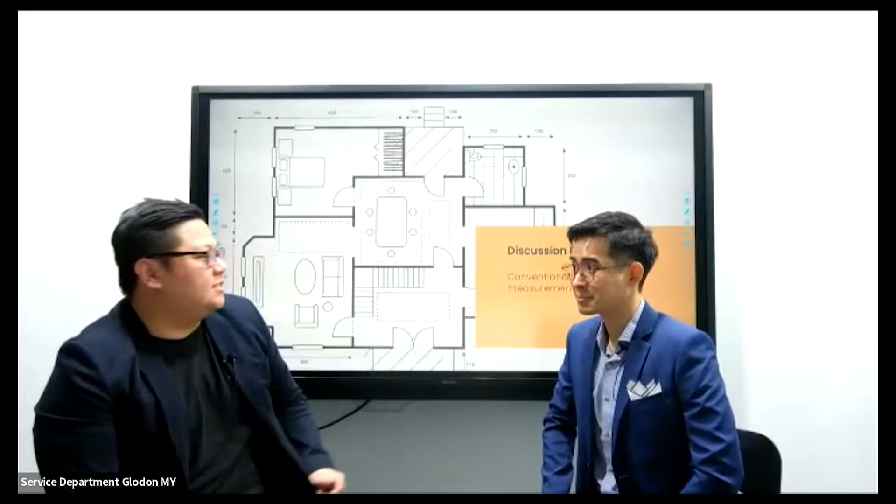If I were to compare conventional versus right now, I would say the first point would be time saving. Right now, with the software, we're able to see 3D. This is part of the advantage.

Compared with manual measurement, we already have a lot of drawings like the layout, section, elevation, details, maybe general notes - all this drawing. If you want to model a single piece of the thing, you have to have all this involved together. So sometimes in conventional method, which is manual taking off, you have to draw some sketches.

You get a very good imagination of those parts. I need to use my color pencil, color it and draw a sketch. Then you can have a clear picture, and then you can start to model the thing. Make sure you don't model it wrongly.

But compared to software, right now we can do 3D, which is a game changer since Glodon software came to Malaysia. You can model this thing fast in 3D form, and it's also easy to teach.

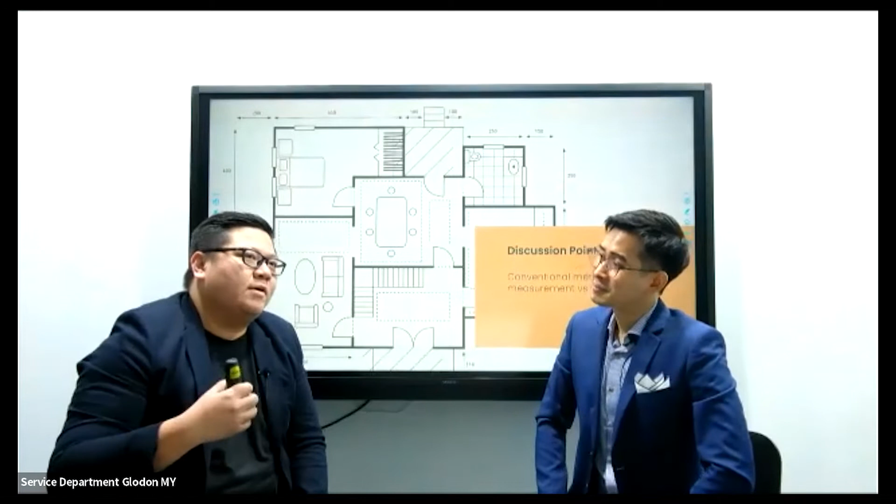Correct. So I think Chris is actually talking about when we want to do the modeling, you need to understand more on the drawing first. To understand more on the drawing, you need your color pencil, your highlighter, so everything prepared when you think better. Sometimes, when I was young, I didn't have much experience but was also very busy. I just had to stay at the drawing for quite some time, and magically it will appear in my head. So it's not quite an efficient method.

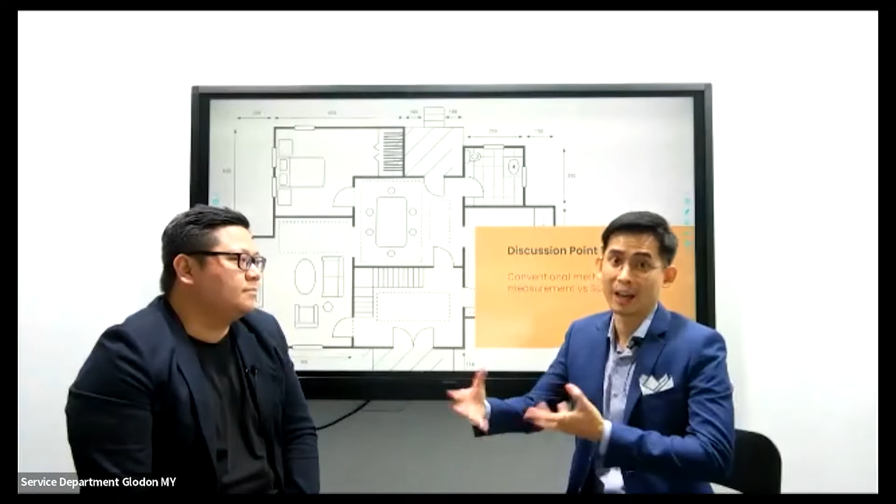Because right now we have a lot of options already, like the software. And Zoom is the best way that we can leverage on this 3D skill to save more time, so the company can do more job and then can go back early.

No way, OT. This is an interesting part for all of you. I don't know what the OT is. Okay, let's talk about the 3D.

So any other points we think? Maybe on the traceability or anything? Yes, exactly, another part is traceability. What I mean by traceability is you can imagine we have all these records in a spreadsheet, if I compare with manual measurement, manual takeoff, conventional method. So we have all this thing, then after we take off, we put it for quite some time. When your senior or your boss asks you, hey, how do you take off this part, show me this thing, show me this thing, it's very hard that everyone can have the same immediate recall on the thing. Because in QS we handle a lot of stuff, not only one - we have to handle tendering as well, other stuff on site, and also taking off other projects, not only this project. So it will make it very difficult to trace.

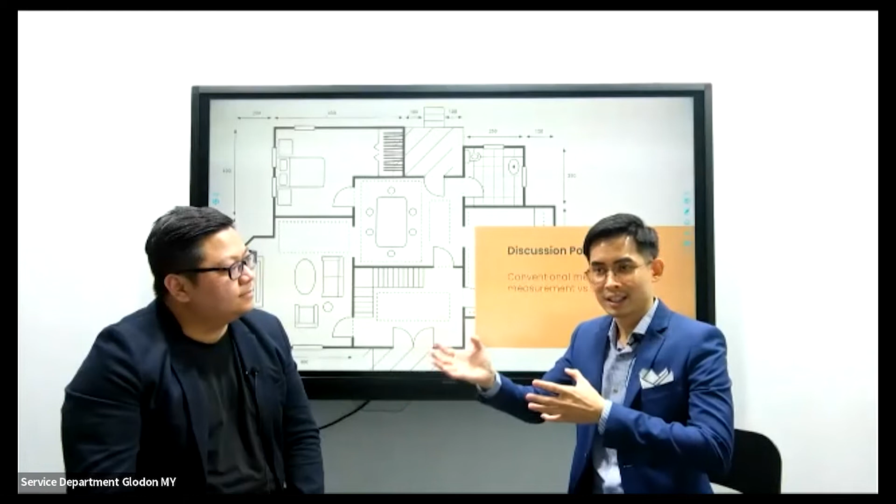However, using Glodon software, we got this function called reverse check model. If you've done it correctly, this whole model will tie into your drawing, and it becomes very easy to let you record - even because we can do 3D. And also by using these features, it's very easy that we can record back the time on how we do this part, because our brain also has 3D which makes it more memorable compared with the manual takeoff.

Yes, true. So let's say if I have a project today, the project duration for sure will be 3 to 4 years. So I think Chris brings a very good point, that with traceability, let's say I'm doing it manually in the dim sheets or Excel, I do not know what is the traceability of this distance, this dimension getting from each drawing.

Then we just come to another part, another best feature is reporting. This means that you need a lot of bookkeeping. For example, in conventional method, after you've done everything, you need to mark it on the drawings, you highlight it, and then you put on the takeoff, the sketches, and also all the Excel that you have done.

So we have to do safekeeping for quite some time. Usually after a period of time, let's say half a year, maybe 1 year, you need to take those things again and record it back. So it's also very impossible - we all know the construction industry, people come in and people go, quite often.

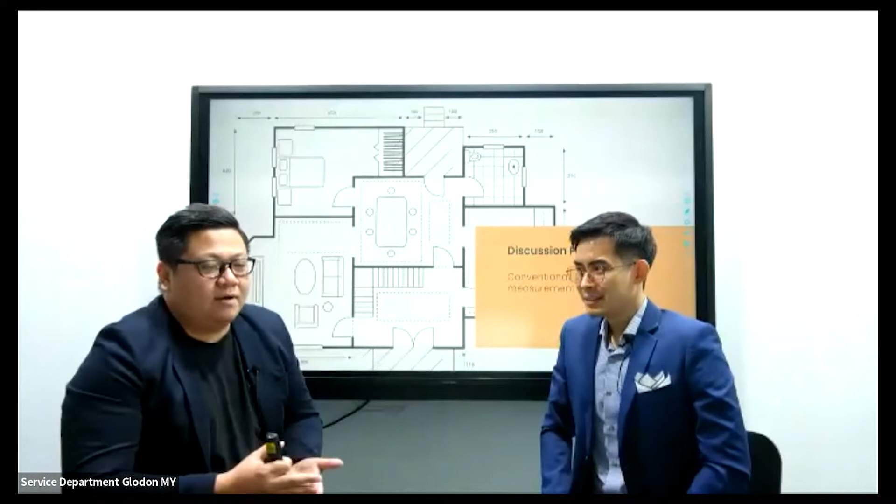So meanwhile, let's say you haven't finished the finalization of accounts, so you need to refer to the drawings. How are you going to refer to the drawings? Oh, I need to drive my way maybe 1 to 2 hours to the shop, to find the archive box, take it from the list, take out the drawings, and then bring it back to the office to recheck everything.

So from here, the productivity, as you said, will be reduced. So you're also wasting a lot of time doing the tracing. I believe our software is able to, as you mentioned, do the traceability in the reverse check model, and if you're using the 3D, you are able to measure confidently, knowing what you're actually measuring for.

Right, and lastly on reporting, we actually store every single report, and that's actually quite neat, quite nicely organized.

So Chris, can you share about before the pandemic and during the pandemic, how you see the situation? Yes, before, everything was like normal, using the same method, it's okay, it's struggling but it's also okay for a productive industry.

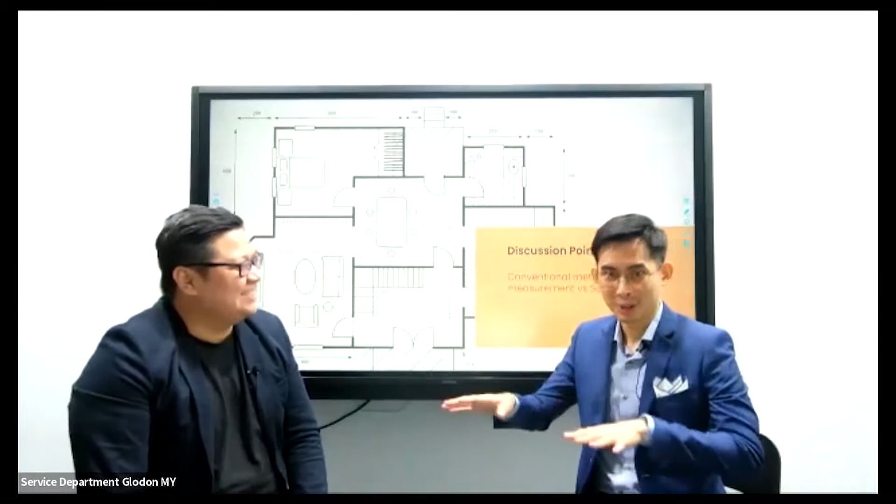Okay, we all know that during the COVID MCO time, we couldn't move. I needed to bring my desktop back home. Yes, so if you have a desktop, you'll have to bring your desktop, which is not a very easy thing, you know. You have to unplug all the company utilities and set it up in your house.

Yes, before that. But right now, even better, we have Zoom meetings. By using Zoom, I can just sit at home, at my own comfort, at my workstation, and present just like this, just like what you guys are doing, sitting on your own seat comfortably watching what we talk about. It's almost the same thing.

Yeah, also not only that, during the COVID time, working remotely actually helped because we leveraged a lot on software such as Zoom, cloud-based software, and one of them is the national Glodon software. So it helped reduce the risk of COVID transmission.

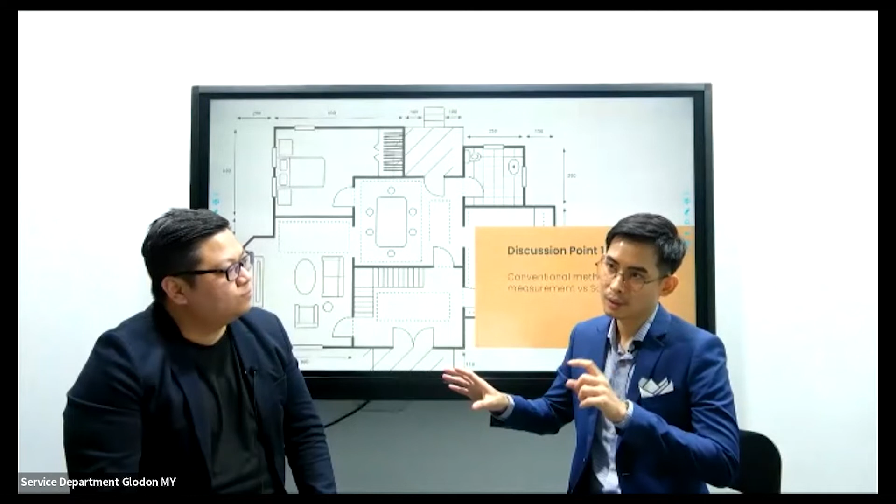It will eventually directly affect your company's operation cost. So is your operation cost fully utilized? And not just operation cost, the best part is I myself see my clients missing out on good opportunities because the operation cost was interrupted. They can't move at full speed, full operation. That's why they might miss some of the good opportunities when they come out.

Yes, this not only reduces your company's operation cost, but also affects your revenue indirectly. So leveraging technology, I think, is the only way, or also the most efficient way, that it can help during this period of time, and also in the next few years.

For me, I believe that we can prepare for the worst and expect for the best. And change out of necessity, I believe. So Chris is actually giving his talk, his own experience during the pandemic time, right?

I still remember during the pandemic time, I needed to carry all the hardware back home. Especially since I wasn't exposed to Glodon, I needed to carry my A0 drawing home. Anyone can imagine carrying an A0 drawing back home. If my house was a bungalow, there would be no problem, I'd have a lot of floor area. But I'm actually staying in a condominium, I don't have so much floor area, I don't have so many big tables.

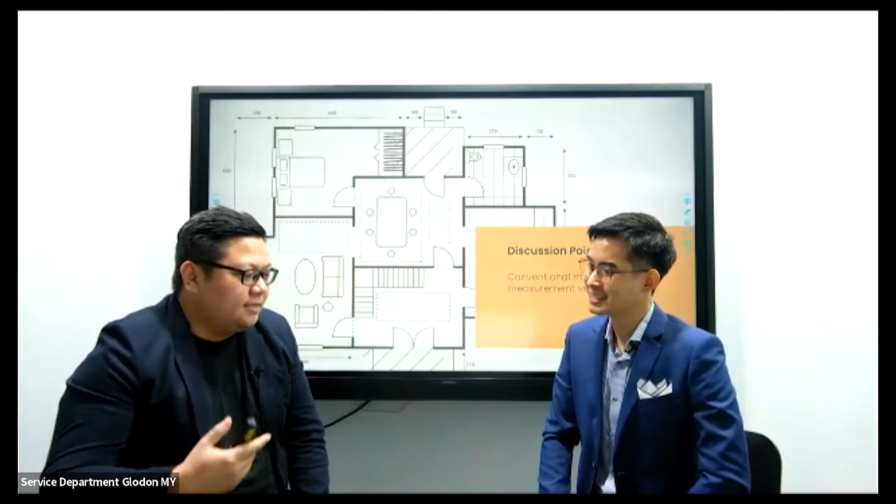Meanwhile, it actually brought a thinking for me personally, what are the other ways that can overcome this issue. Since my house is not big, I need to share, maybe with my dog, with my housemate. So it's kind of disturbing in our life. I think this is another way, another thinking about social life, on how we're going to do digitization, how it actually can help us.

Before we start this talk show, I just talked with Sam about working remotely. It's not about what we call emotion. I said, if you work remotely, then you have more time with your family, no? Actually, yes, more quality time with family. During the time I've not been working full time, not stationed in office, I stay at home, so I've been having more time with my family. I don't feel any different during COVID.

However, there are two stories I want to share, both from my clients, who told me personally. The first story is about a QS, around 30 plus, a friend of mine, and also a mother of one child. The child is quite 5, 6 years old, quite small.

She never talked about working remotely before. So when COVID hit, we had no choice but to work at home, during the MCO, the movement control, which other countries call lockdown. The government didn't allow us to go back to the office, so we had no choice but to work from home. She told me that unexpectedly, she didn't know she could work so flexibly and increase her productivity, with more time.

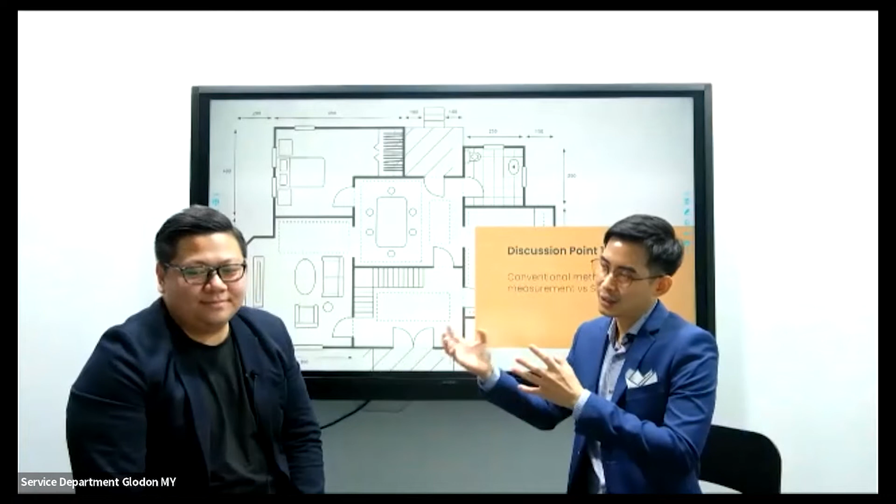Traveling, stuck in jam, and gossiping in the company, not actually working, everything links back to productivity. Yes, water cooler conversation, talking about all this nonsense. So by working at home, they converted this into quality time with family members, with her kids. She told me she wishes she could work remotely for as long as possible.

For me, when she told me this, I'm single. For me, kids are supposed to be put in daycare, I know parents will take care of it. So I don't actually know what she's talking about, but I can sense that it's quite authentic, quite real for her.

The second story is about the loss of great talent. This is a friend of mine, a very young QS, very talented, around 25, 26 years old. I think I met him last year. His job is a site QS, and he told me about this.

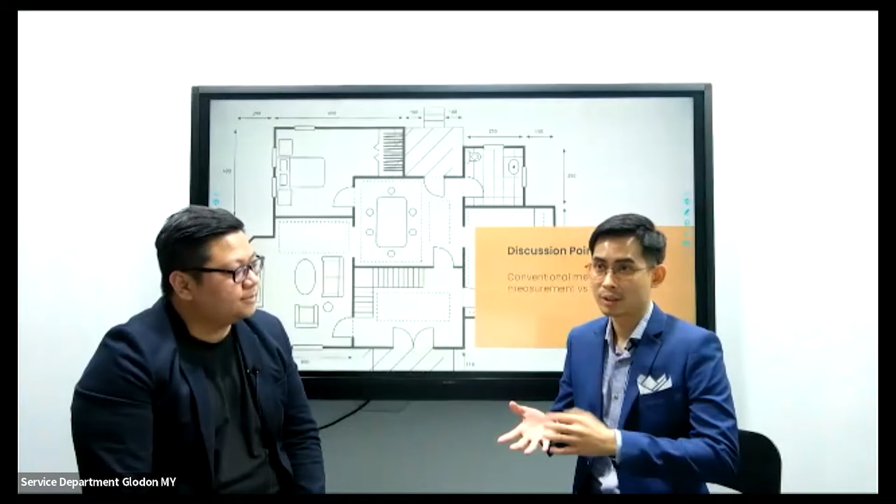Construction is already a dangerous job, we risk our life every day, because things fall down, you get injured, then you can't work anymore. Not only that, when COVID hit, he had no choice but to go to site, and had to have close contact with a lot more site personnel. So he got very fed up because of this.

Yeah, I understand, truly understand. That's why I can say it's a lost talent for the industry. So Chris, let's sum up this section on the conventional method versus the software method.

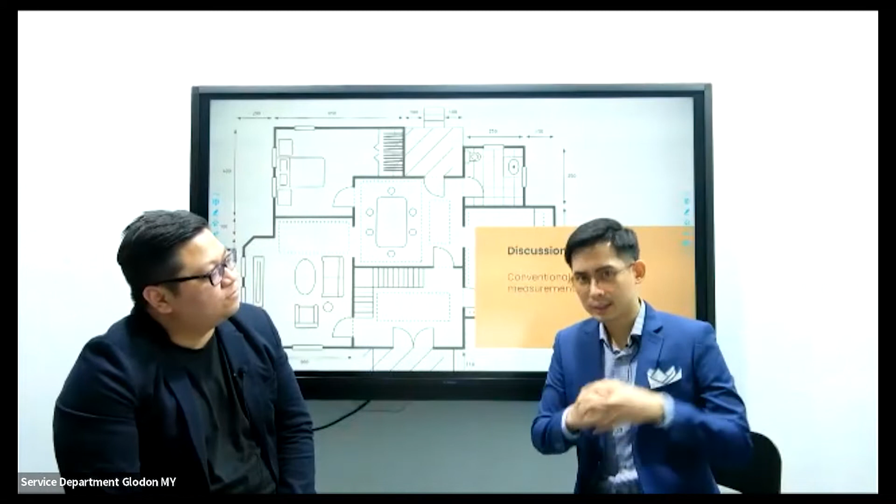It will be about productivity. I believe that in this situation, it's best that we leverage more on technology, rather than going back to what we had done before. I don't think those old methods really have the productivity or really work in this situation.

We should leverage more on the software. So when we talk about productivity, let's see Chris using our product, our Cubicost product, to model out some of our case studies, the successful case studies. It will be a sneak peek at our case study by Chris. So Chris, can you briefly introduce this project?

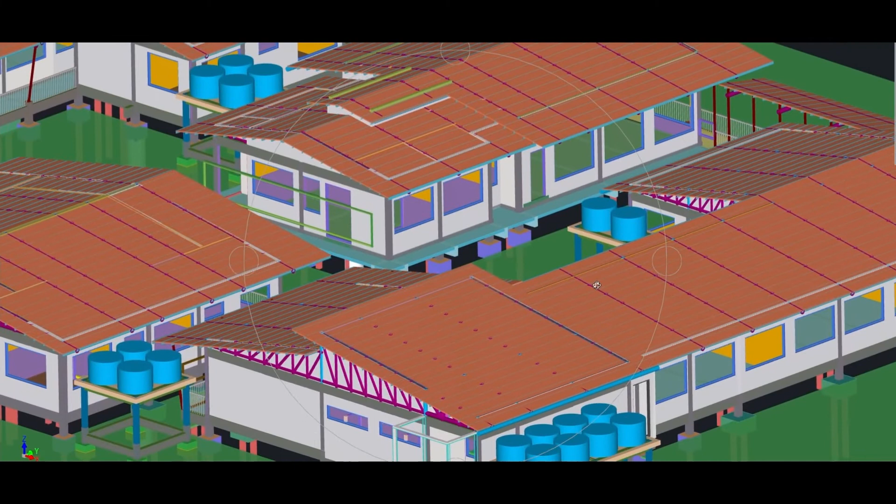You can see the water tank here, and I modeled most of the steel structure all together. When I take off the roof, you can see much more clearly how these structures are actually modeled inside the software.

So even the water tank, you fully utilize the function in TAS to model everything. Yes, not only the water tank, but the toilet holder and all these things use the custom quantity that we take off in that area.

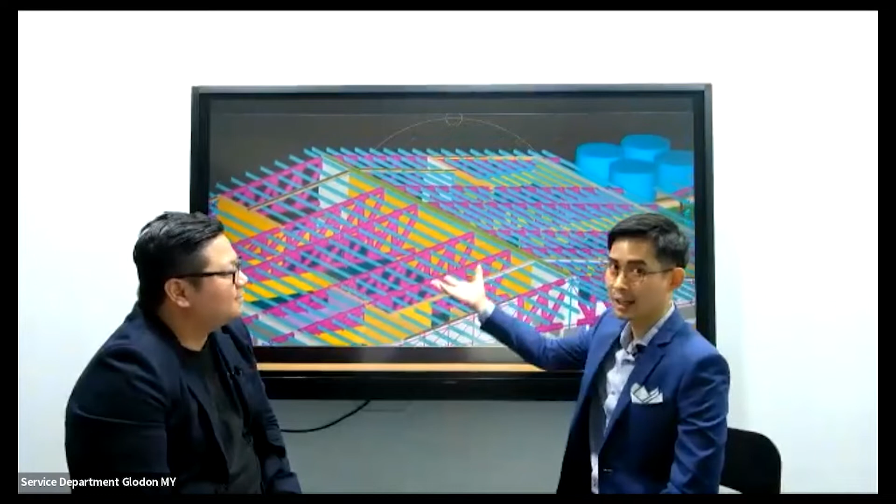So let's go back to what I said: one model, one TAS, one TRB, and one TBQ. These three store this whole data together, and it's able to be traced back very easily.

So this is very interesting. Even the details of all the main members, the components, or even the components for the bracings, everything is actually modeled out. Another project, this is the national school that I did quite some time ago, in 2017.

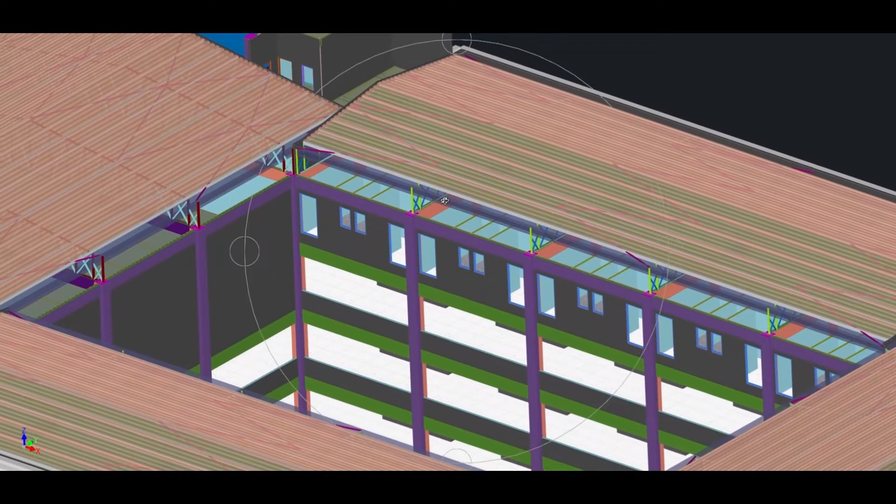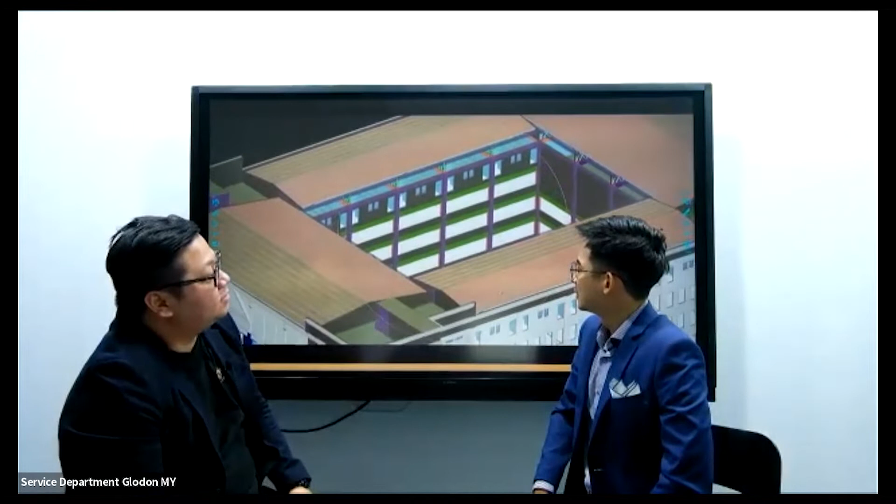They will use this steel structure for their structures, mostly at the roof, and roof and entrance. I think all these are the wind bracing, these bracings, the trusses. So what do you actually differentiate in terms of color?

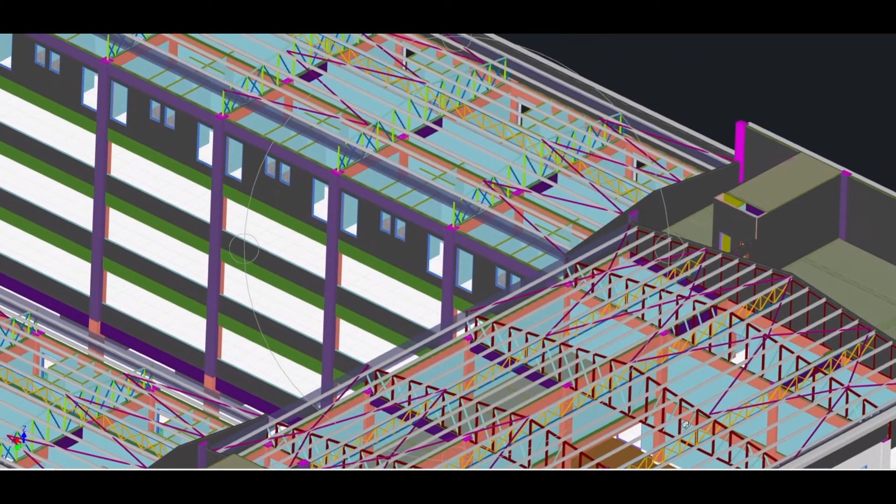Our color indicates the difference in steel I use. The gray color is the same type of steel, a C channel, so same kg. Why I need to separate by color is that when the client asks how many of this quantity this steel consists of, I can just straight away highlight it and show all the quantity and location.

For the specific area, you differentiate in terms of color by the component of the steel members. Exactly. So they can easily track the whole thing and visualize it before it's actually built. This is your ID, so all the bracing is here.

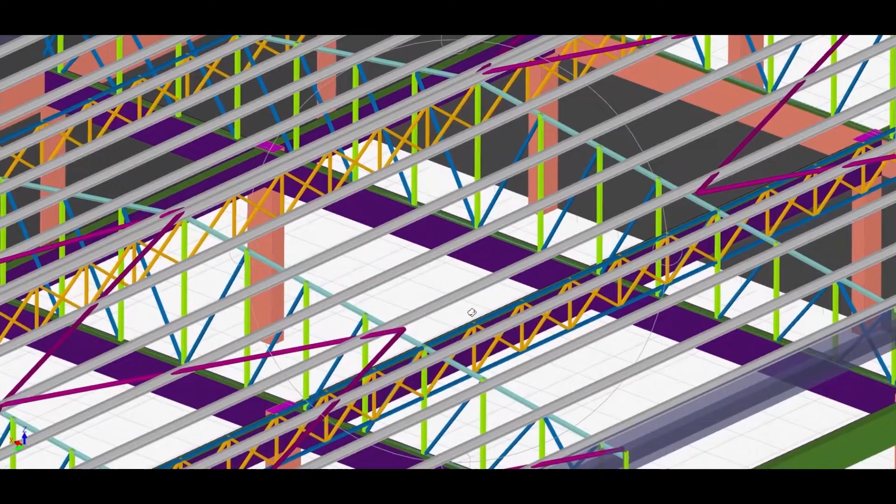So what you can see here is quite easy to understand, right? Yes, compared with manual measurement, where I give you a spreadsheet with tons of data, this one is the C channel, how many of them. So this is the first point, viewing in 3D. Back to my point, in 3D I think it's quite different if you can view my project.

So that's why you're the expert. Not expert, we just want to make the construction better, and also improve productivity. Plus point for your client as well.

If your client asks how these things look like, you can say my quantity is like this - even your building is not built yet, I can tell you where this quantity is located. So it's also a plus point when you talk to a client, and added value as a QS. Not only do we provide the quantity, not only do we provide the tender document and the estimation, we are building up our own value to let the client know we are better than a typical QS - we are a BIM QS, I can say.

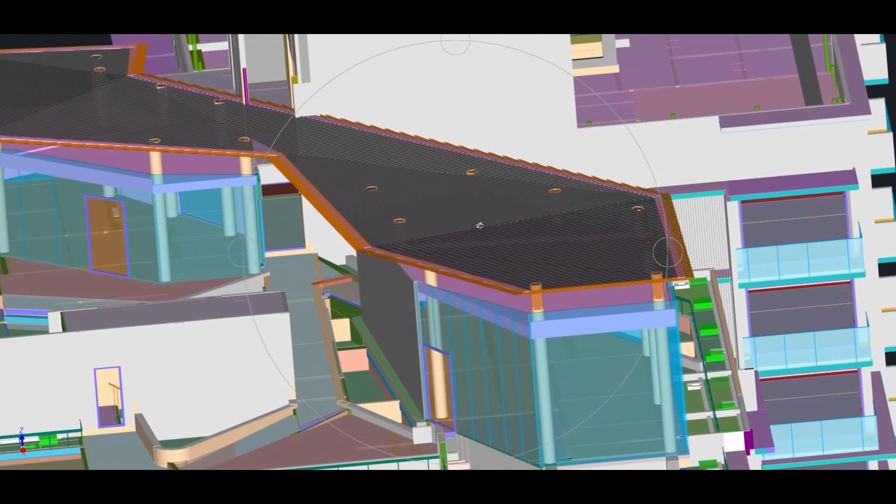Saves time on meeting too. This is one of the projects, you can see the swimming pool down there. Even the swimming pool finishes, what the mosaic tiles, you're also able to draw it. Almost everything can be drawn. These are all the glasses over here. This is the steel also, there's steel trusses - mostly at the podium side. This is the top rooftop podium, and this is one of the mixed developments, so there will be similarity - every project you will use some of the structure.

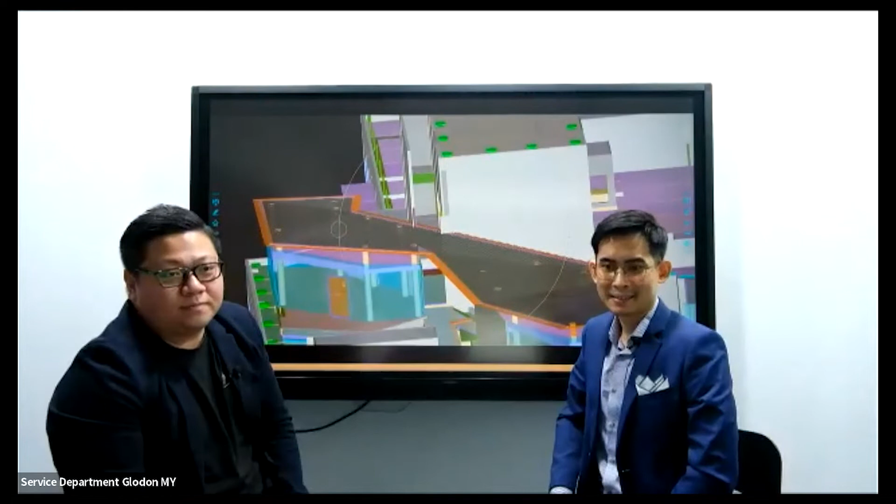Unavoidably the weightage is not much, but the quantity still brings to our total construction cost, which is very important. With steel prices hiking, what we can control is not the price - God can control the price, we can control the quantity, either by manual or by software, up to your choice. So that will be our case study from Chris.

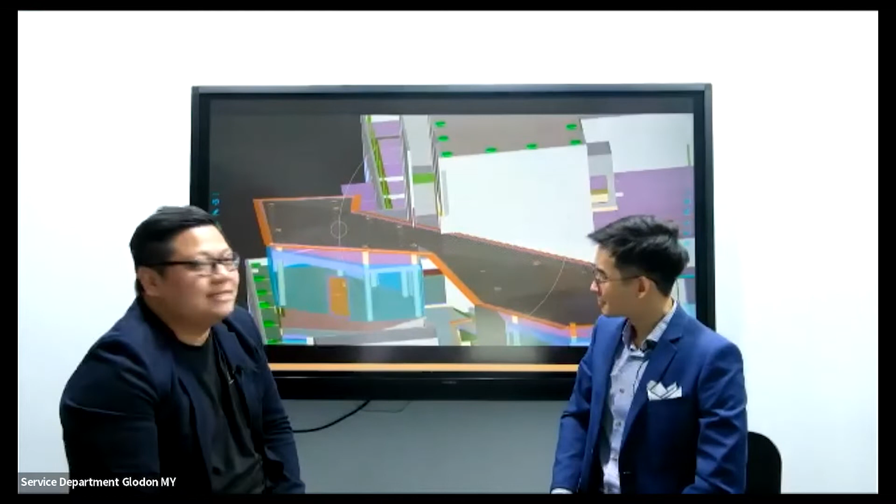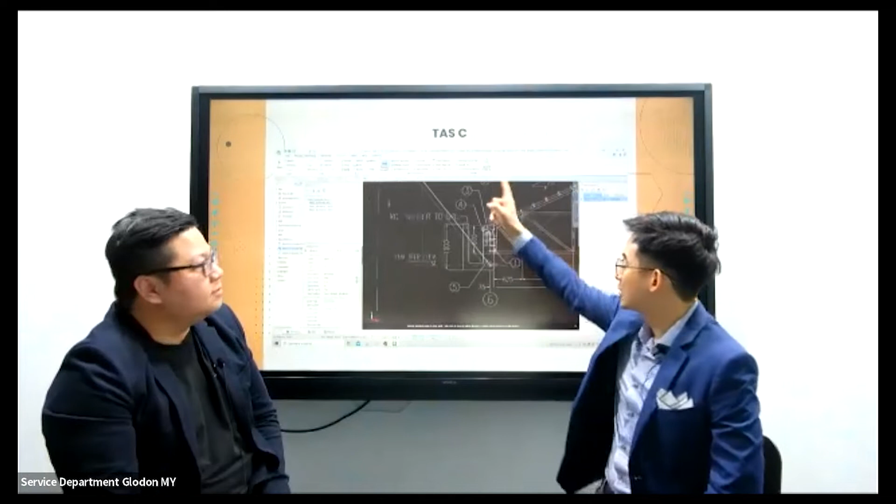Okay, tremendous work. So we dig down on the steel structure. Maybe Chris, can you share how you actually model it in TAS C? Yes, right now I will compare - it's the same project, the international school. I've done two videos: one using TAS C 2019 version, and the other this year's TSC4. Right now this video is the 2019 version.

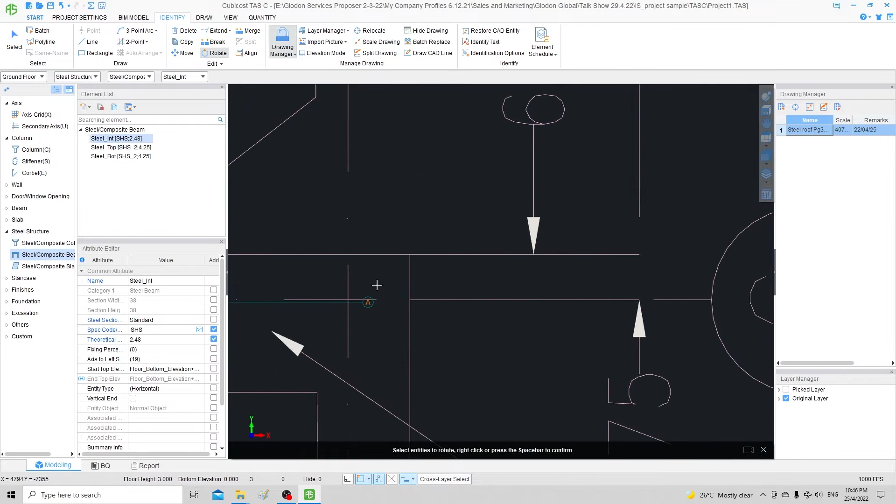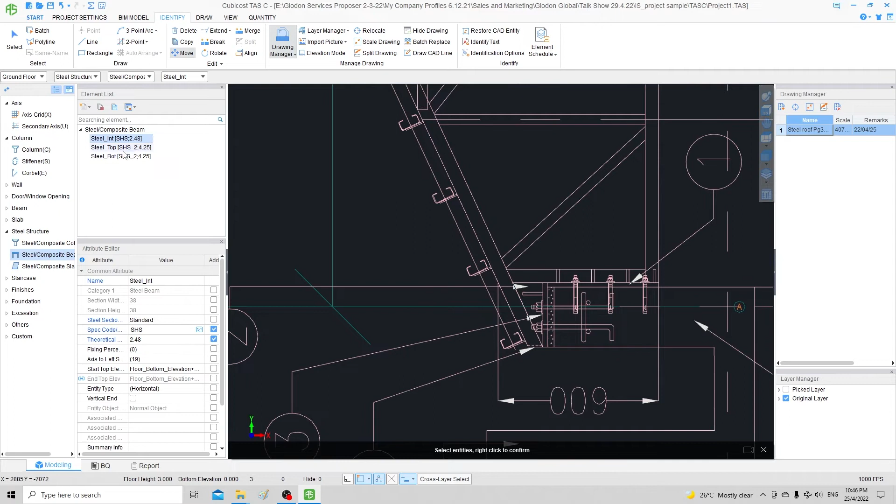As you can see, this video is around 12 minutes long - quite long. This is how I modeled using the previous software. It's quite tedious - first I had to move that section down here, plug it beside the layout, then scale this whole thing, move it correctly. Very important - the user has to get the drawing right before starting. Right now we do not need to do this anymore.

It is quite tedious. The drawing has to be right first, then you only start on the modeling. So this is using a steel composite beam. Compared with the latest version versus this 2019 version, the latest has more library options. Inside this element, when you click into the TSC form, they have more library options - most of the steel structure can be located directly from there. Compared with this version where you have to type manually, you have to manually key everything in.

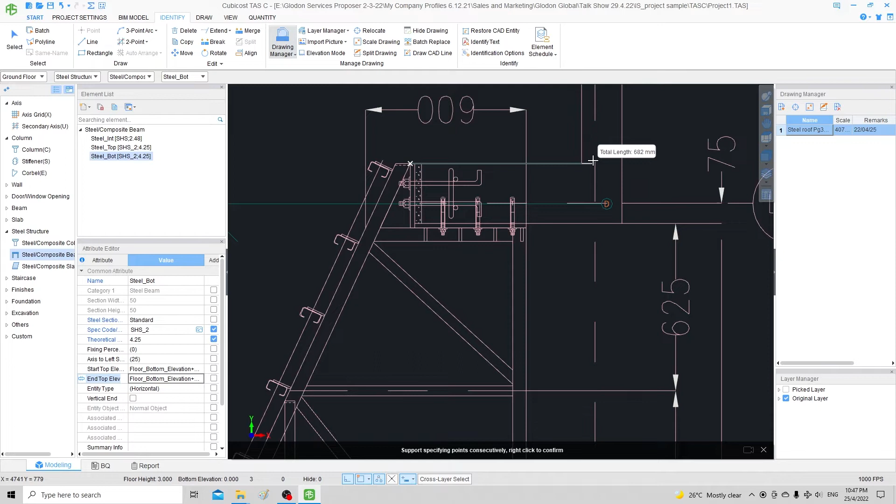In the 2019 version, you don't have much library, so you have to take out your list of steel, from the supplier or from other past projects. You have to key in exactly what this thing is, what that thing is - search all the kg per meter, this SHS and steel channel, what size, the actual size, size times thickness, then get the length as well and the kg, the weight. You have to manually type all this part, which is quite...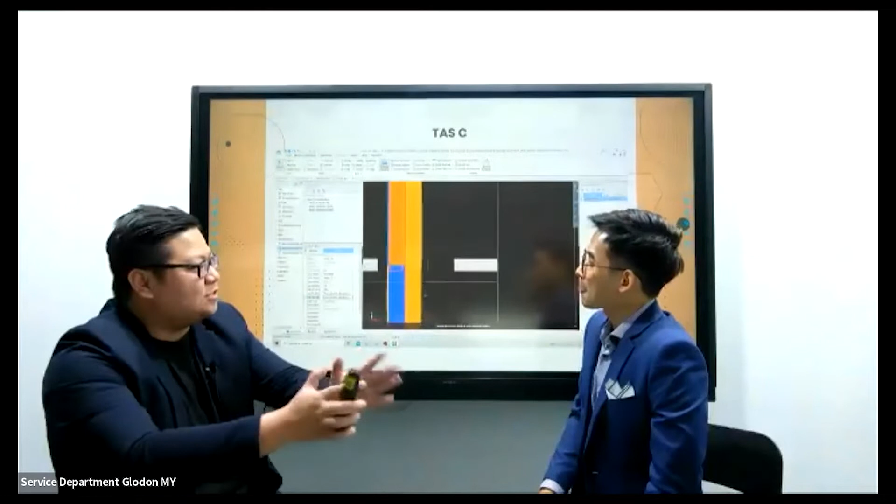Compared with the latest software, you'd need many sources of referencing just to get one quantity. Right now you do not need to do that - most of the steel structure data is inside the software, so you can save a lot of time just by that alone.

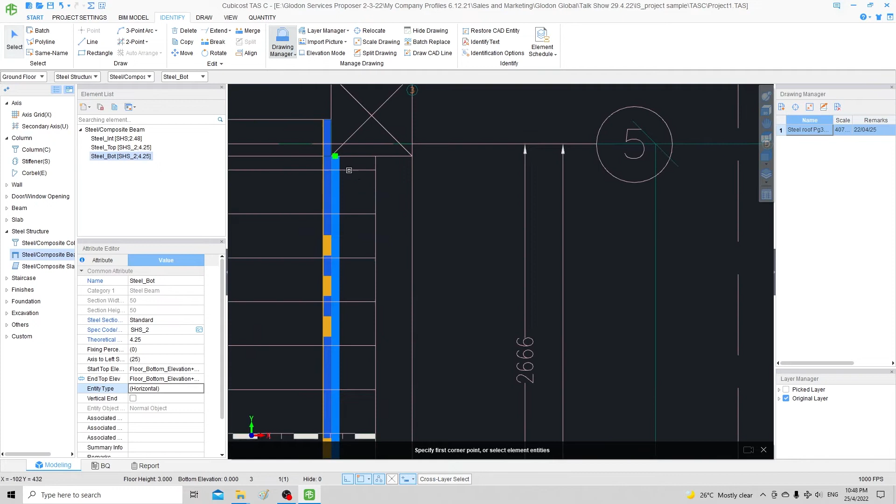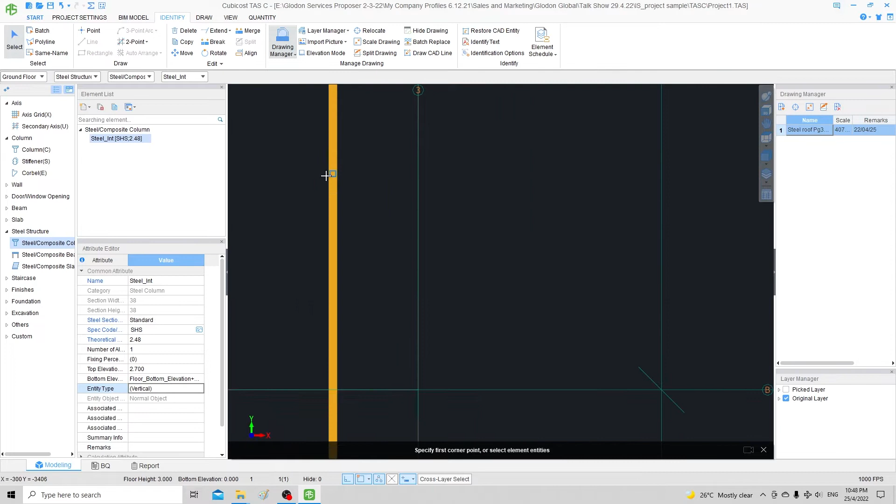Right now what I'm doing is the elevation. Oh my God, this is the part that's tedious - that's why I did receive feedback from my client that I want to model steel structure using Glodon software. You should use it. This is how tedious it was to model before TAS C 4, the latest version - almost everything you have to manually adjust on the elevation, and also locate the column, make sure it's correctly tied with this one, 1001, make sure you tie with this continuous... Question from the client, Chris - do you think it's worth it to adjust one by one?

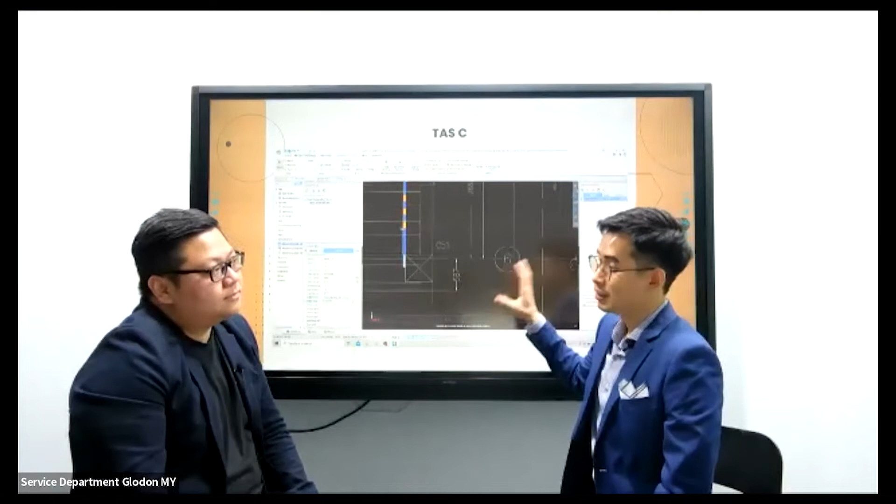Not many people are willing to use this function because they found manual taking off is even faster than this one. But before talking about the 2019 version, I do this because I want a better record.

Let's say this project is done 20 years back. Right now I look into this project and want to trace back all this drawing. I can trace very easily because I typed all this drawing somewhere. That's the traceability and the reporting system.

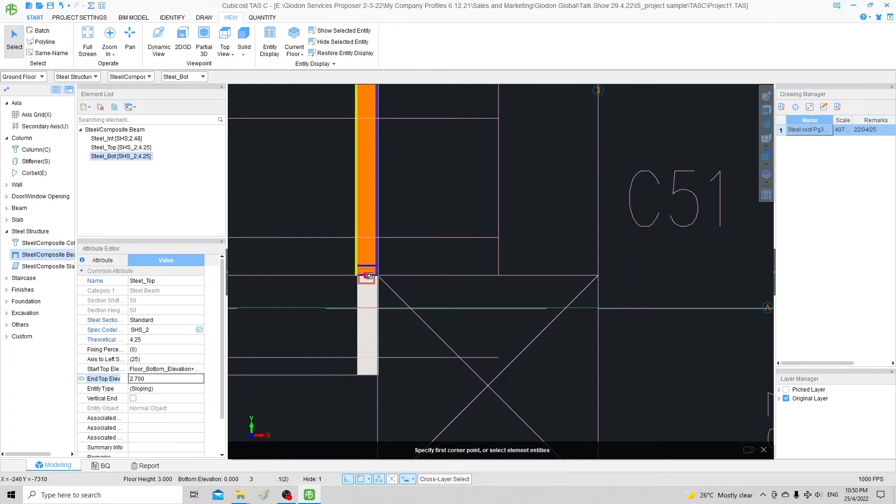So how do you adjust? Do you adjust the elevation one by one? Yes, everything one by one. So from here you can see I'm actually adjusting one by one.

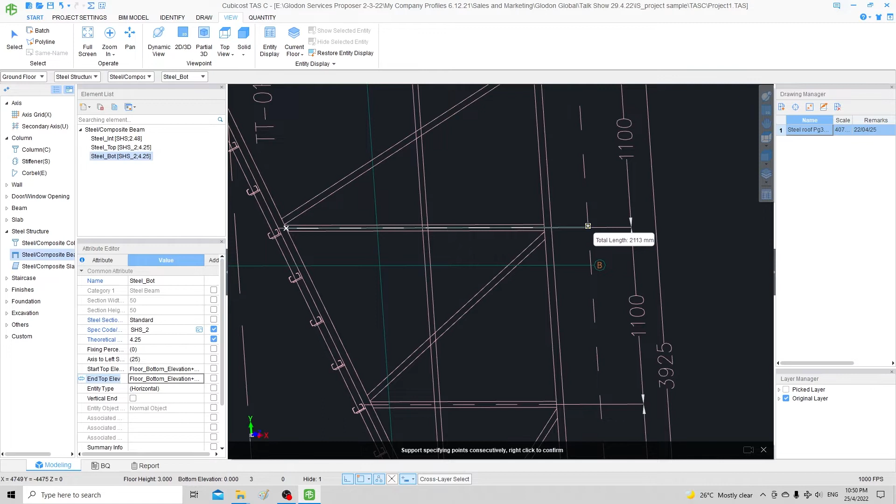Yes, the start elevation. For horizontal element I use beam, and then we adjust on the end part and also the other side. And for the vertical section, I have to do like this, just like on the steel column.

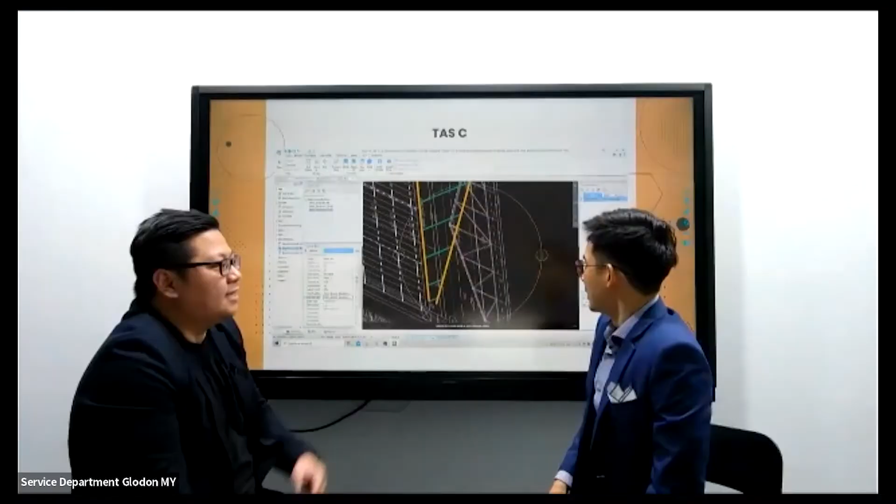This green color - you see, I have to measure on the left of the section, the input on the model. Although the process is tedious, most important is the traceability.

The traceability - during this time it requires quite a lot of skill. If you ask a trainee to do these things, they were unable to because of the elevation they have to set and some features they have to master. It's not that simple to do.

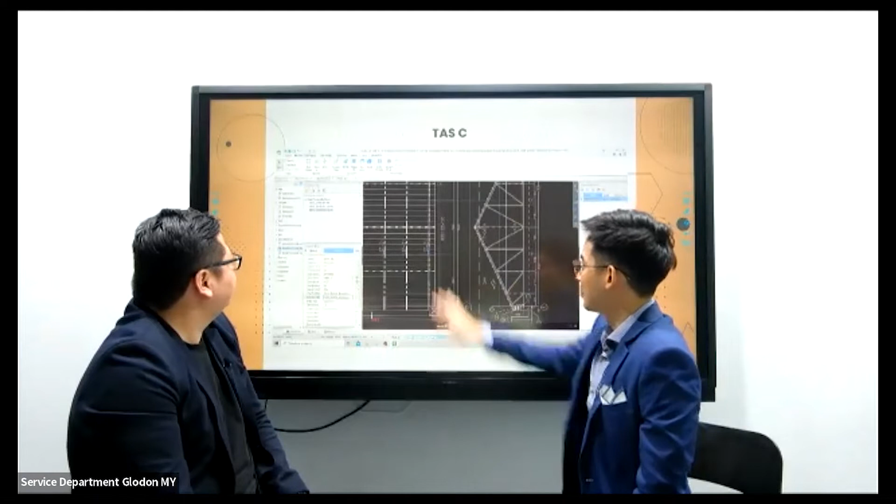But compared with right now, the latest software is actually different. I'm showing this in the next video - you'll see the difference between these two. These are the parts that actually save a lot of time here.

For information everyone, we have steel for column, for beam, and also for slab. If you have any checker plates, all this kind of design, you're able to use this slab - use this horizontal element, slab, beam, and also the column.

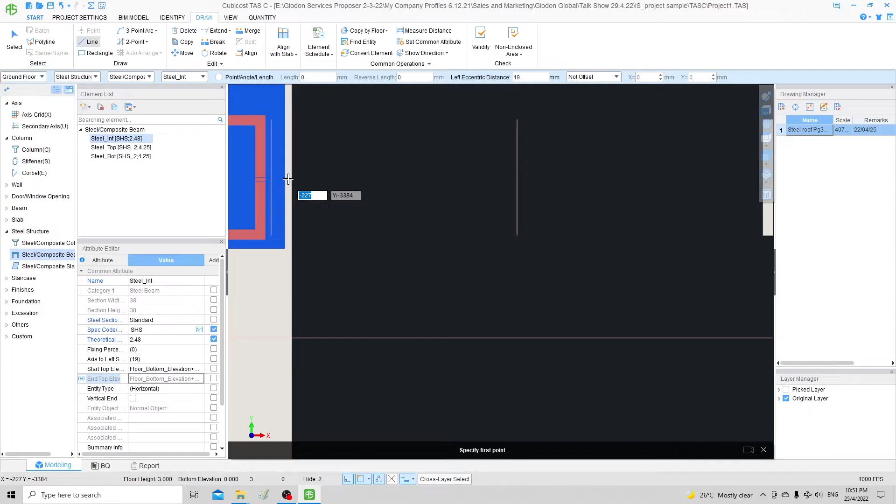So now you're actually adjusting, you're moving. This will be the bracing I guess, the middle part - there's a steel at the middle part over there.

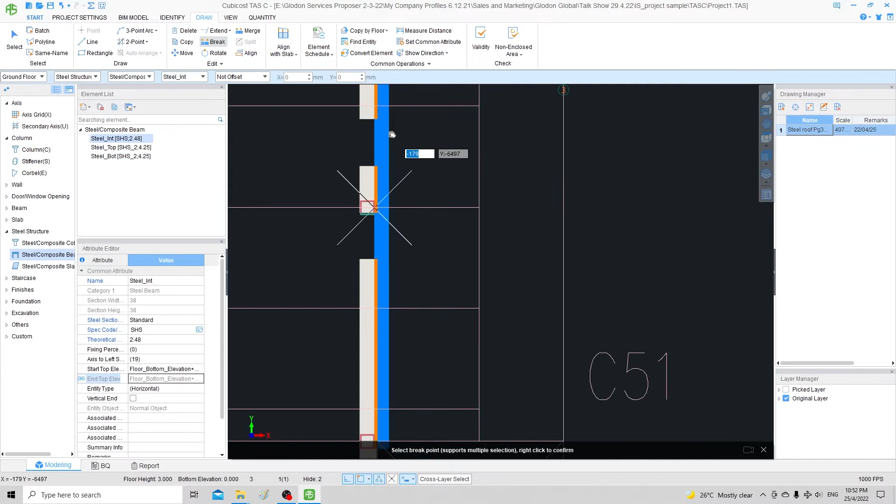So from you guys, if you are able to identify TAS C, you need a lot of adjustment on the elevations. Quite tedious, right? Actually this part is doing the diagonal part. See, the other drawback is that it crashes.

You will be having the overlapping one - overlapping is an issue. You need to move it slowly, one at a time. Second attempt also again. Third time, maybe very successfully - right, it's been successfully done.

You see, so we have to worry about this during the old version. Right now we don't need to worry about this anymore. We have to break each of them one by one. You do it for the horizontal part, for the flat one, and then break it, and then change the elevation again.

Because I will do this part, you see - this part, the diagonal part. So here, see how I do that. I just break - first of all I draw, then break, take the column, the elevation that is keyed in, and copy and paste.

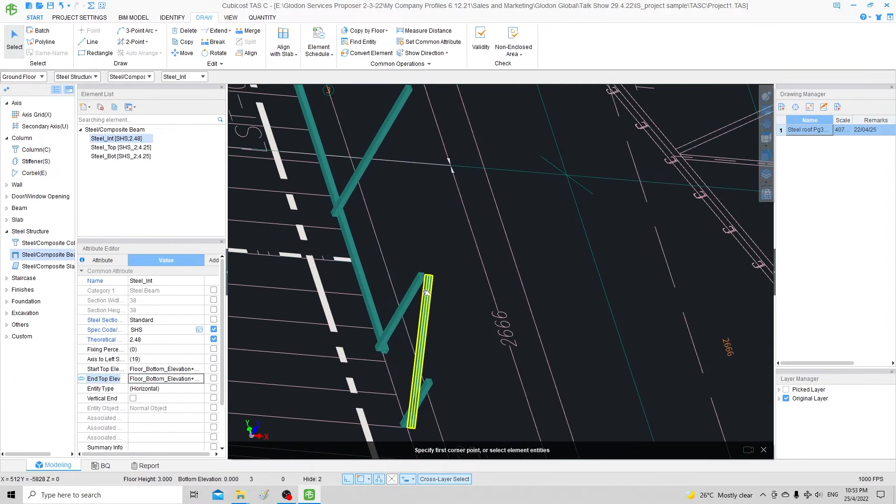I unlock the end part, make sure the quantity of both sides is separate. So this is how you set the diagonal. Doable, everyone - doable in TAS C.

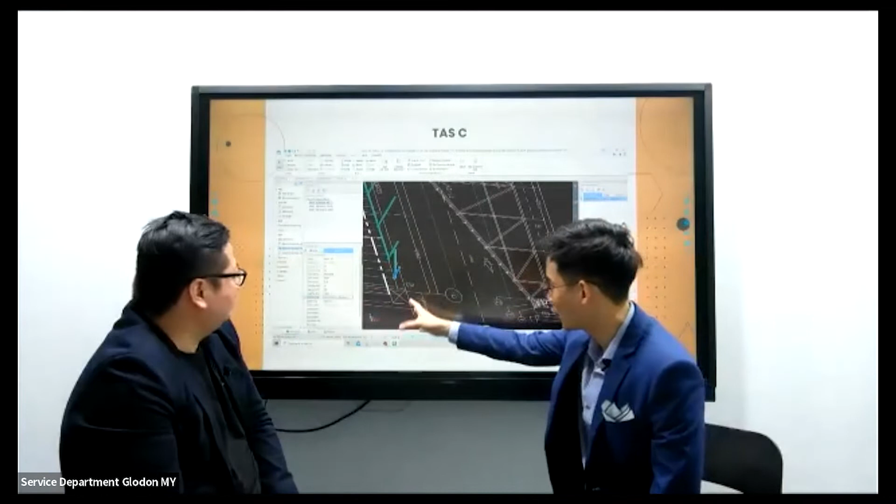Doable in TAS C, but right now we have a new function, we don't do that anymore. So before that, as you can see, you require a lot of skill - you need to measure distance, master quite a few functions before you can do this in the previous version.

So Glodon did know that we have some problems in this area. Eventually, I can say Glodon is good because they found it and then improved the software further - enhancement, to make the whole thing faster.

So every year we do have different versions. We optimize the existing features and gather all the feedback from the client, anything that can be performed faster in terms of productivity. We listen and feed that back into the latest versions.

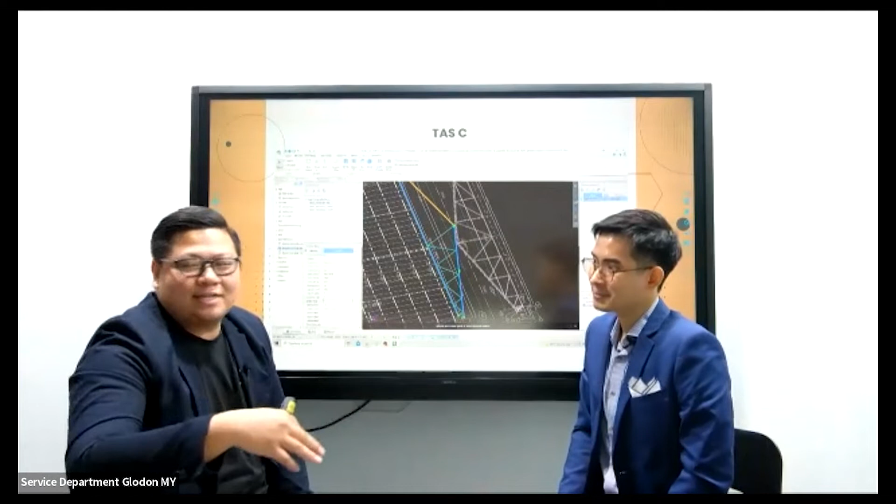So Sam, how many of the Glodon staff actually work on the products? I believe there are quite a lot in China. Basically for the Glodon product team, talking about the whole Glodon team in China, it will be around 5,000 to 6,000 employees. So there are quite a lot.

For information, Cubicost is only one of the products that Glodon brings to Malaysia. In China we have 100 or 200-plus products currently. That is our sincerity, I can say, to return to the community in order to help the AEC industry for better productivity, traceability, and at the end of the day, you bring out your own value as a QS.

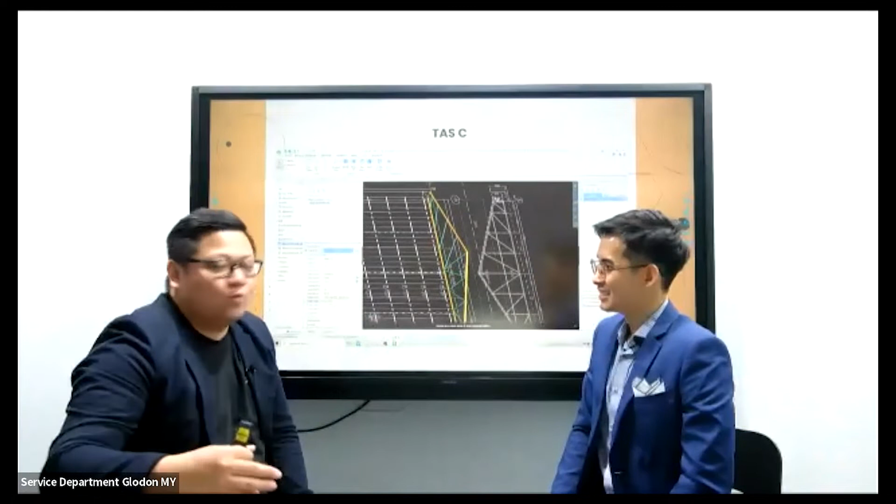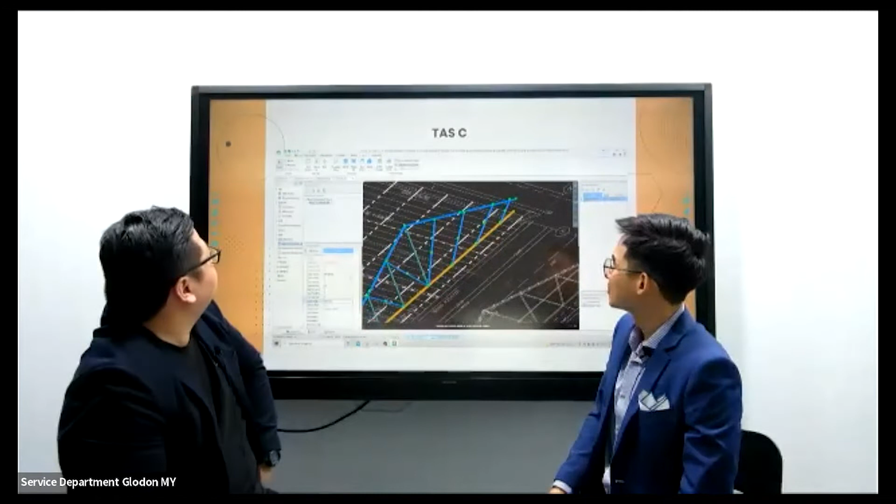So this will be the one, the PSC with the bracing, the horizontal diagonal one. Almost done, back with me. So this will be all the information. We're going to batch select the whole thing, as we can see it here, we're going to select.

So right now I want to mirror it to the other side, because it's duplicated on the next part, the top and bottom. Once everything is done, I have to copy on the next part, which fills the whole trusses. The tedious part, I think Chris will only do one time. You do it one time, then you can refer to move, copy, duplicate, or mirror.

Please also take note that during this one, I used steel column and steel beam. On the next one, I'm not using this anymore, because on the next feature, TSC4, we have a function where the beam can be selected using the CAD line, which can draw straight. Yes, so here goes the truss. This is the truss that we're actually expecting.

Some of the levels are not completed, so we have to key in the level. After done, then we have to copy and duplicate to every single one, I think you should best select the whole thing, then just copy. Okay, three more seconds guys, you are able to see what is the end result you can get on TAS C.

And that's how we copy now, copy one by one. So other than that, the rest we're going to mirror it, or you can copy, select most of them and copy straight away. This one is surplus extra. So this is how you model the whole thing, this will be the end result guys.

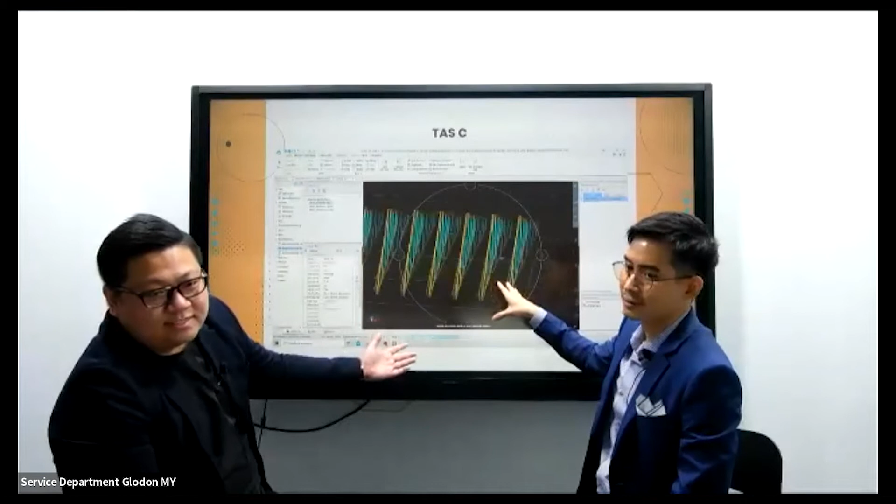The end result, at the very first beginning, you need to do the setting, measure distance, set the elevation one by one. This will be the end result of the process in 12 minutes, version C, TAS C, using 12 minutes. Can you surprise me more on some of the functions in TAS C-IV, Chris?

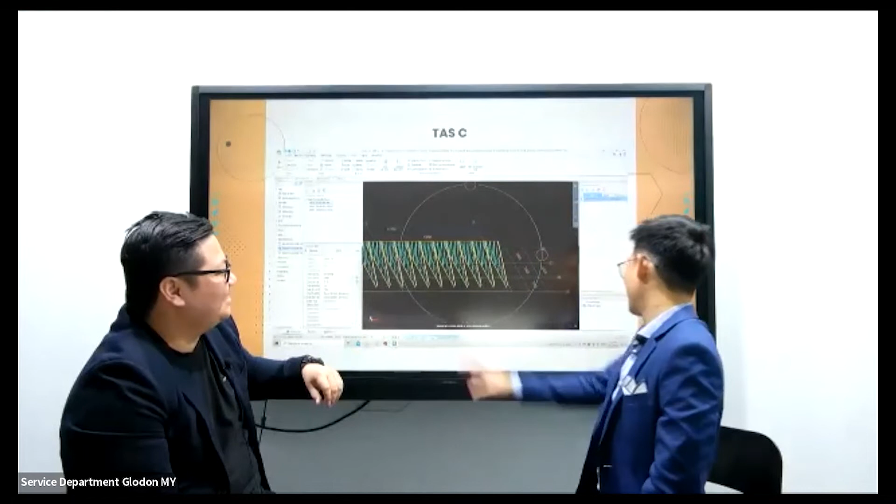Yes, right now we are showing you the same project, the same process, I do it twice. So in the next video, this will be using TAS C-IV, and this video is 3 minutes. So you can bear with me how this is actually using the latest function, which we call the enhanced function.

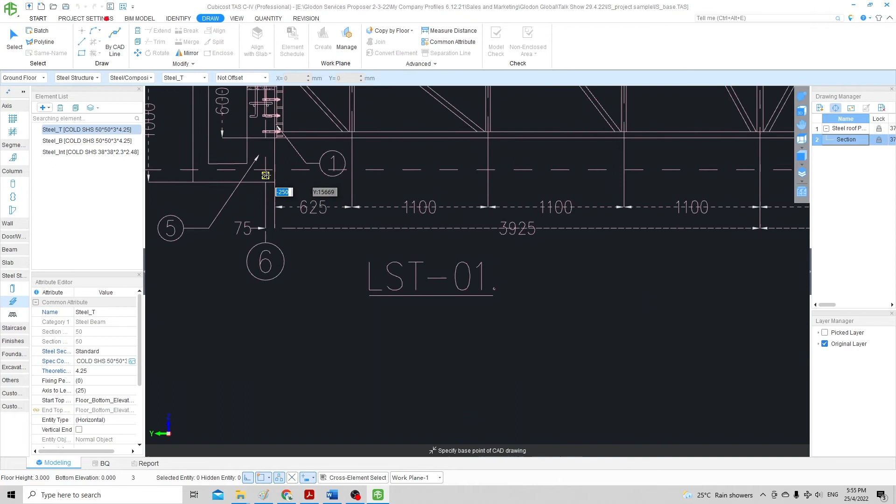As you can see right now, the elevation is separated directly before using the work plane function. We are using the work plane function, I just have to move this drawing to the work plane, and then from here adjust the drawing.

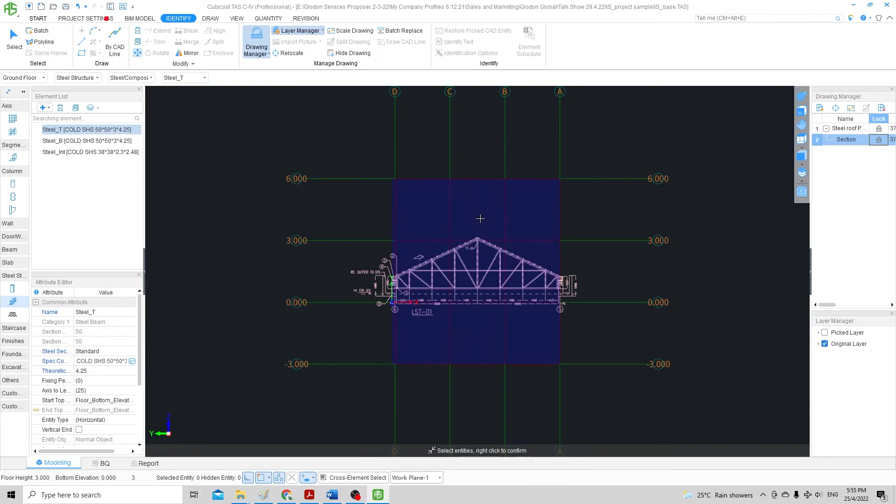So you are actually moving it? Yes, we got some height over here, right? It's not directly on the floor, it's at 400 above. So we can adjust this as well, right?

From here, this is the fastest function in this software. You can either use it drawn by itself manually, use the line function to draw it, line function as usual. Wait until you see how I click on this one. You have another function called the By CAD Line.

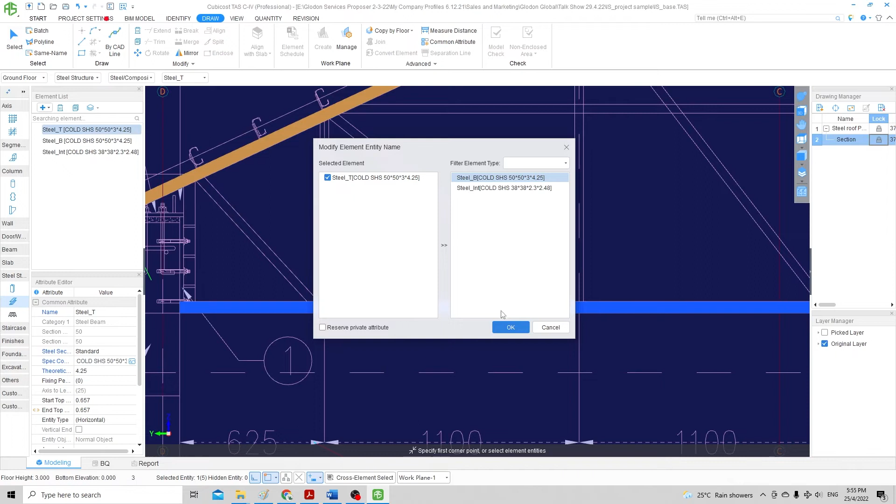This one we're still using By CAD Line, so this will be the new function that we have. That's the function we're talking about. You see how fast I do all the vertical and also the diagonal. This By CAD Line function, you're able to identify the line based on the existing AutoCAD line that we have, so it will auto generate out the members to you guys.

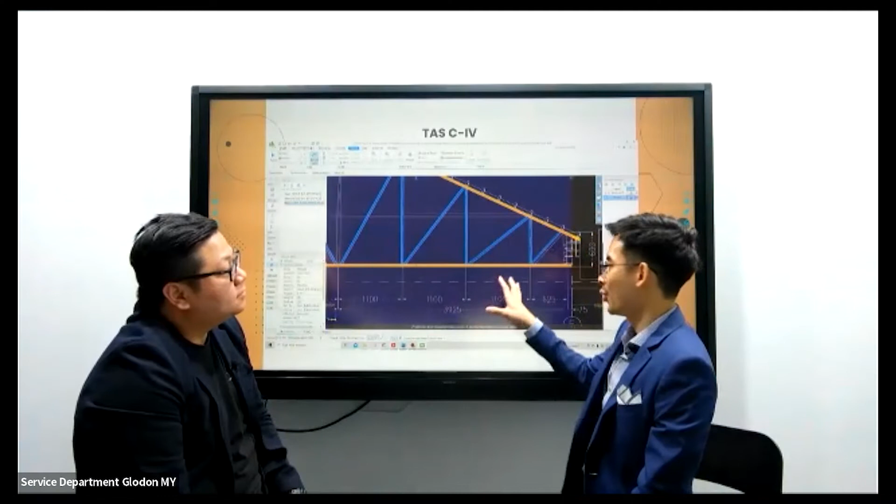For your info, this is a CAD converter PDF. It's a CAD converter PDF, yes everyone. This is not a CAD, it's a CAD converter.

For those who attended my training, still remember there are how many sources of drawing? You still remember, put it in the chat box. You might be the lucky draw winner later. Lucky draw. If we have the lucky draw.

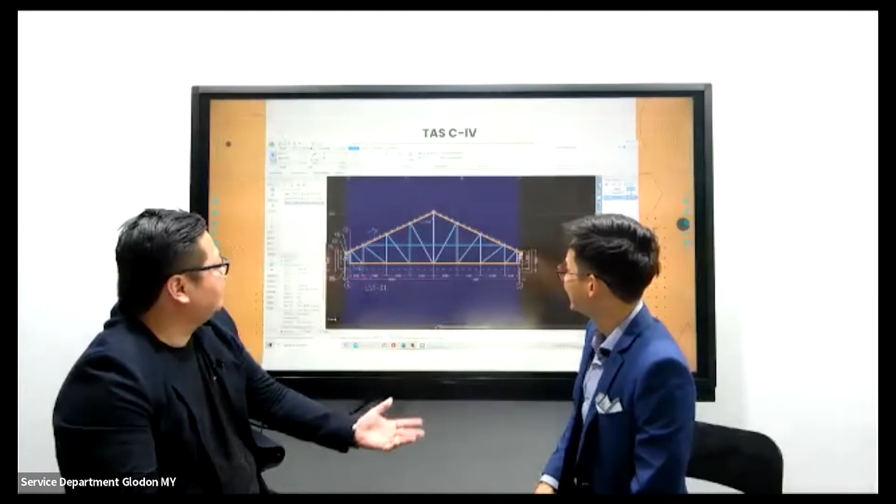In few seconds, we already done all the bracing. You look at this part section, how fast I draw compared with just now. Yes, the same route, so this will be the first one that you're going to.

Right now we just copy and then I use another function called mirror, directly mirror. So instead of that, this function actually is the same.

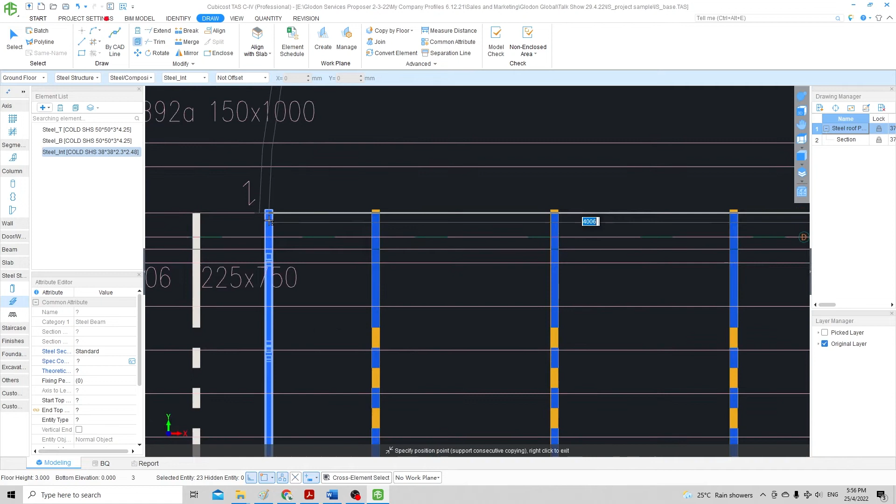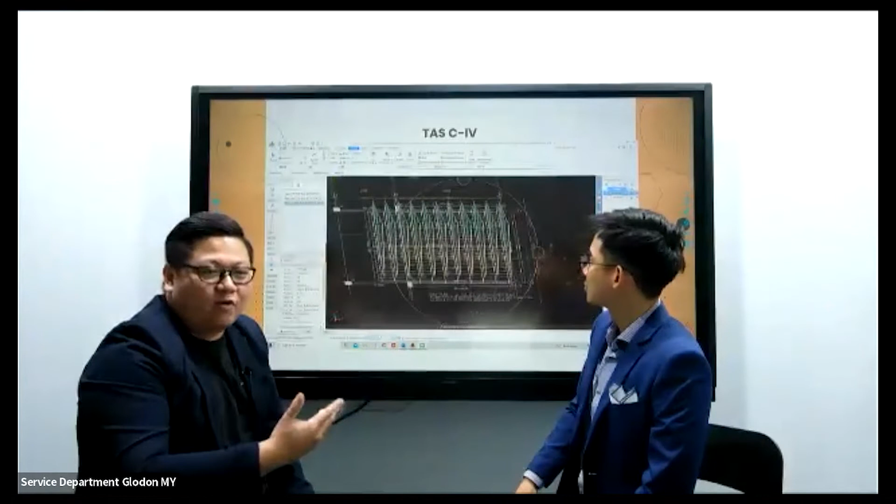We'll just copy everything, so I think why Chris is actually getting the real concept of modeling steel structure in C-IV, he can actually gain the differences. Why the differences is one is 12 minutes, one is 3 minutes, with the new function that we have. So I think Chris is actually choosing a very correct path, the correct path to try on.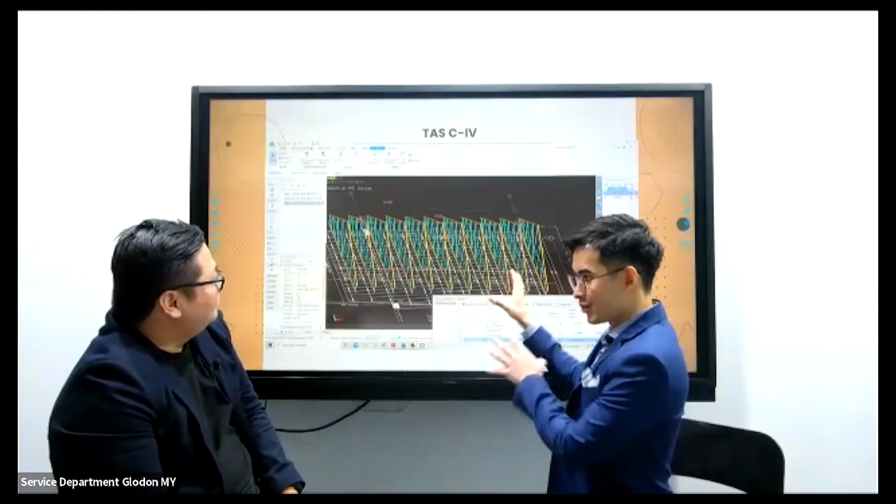He insists to the client to try on: I want to use Glodon to model the steel structure. What I can say is Glodon also done their part in improving and enhancing just a single function called steel, only located somewhere over here. So this feature is actually included in the TAS C-IV software. So you buy the whole software and you have this function as well.

So this function alone is improving. We're not talking about other functions today. Until midnight, we will talk about this.

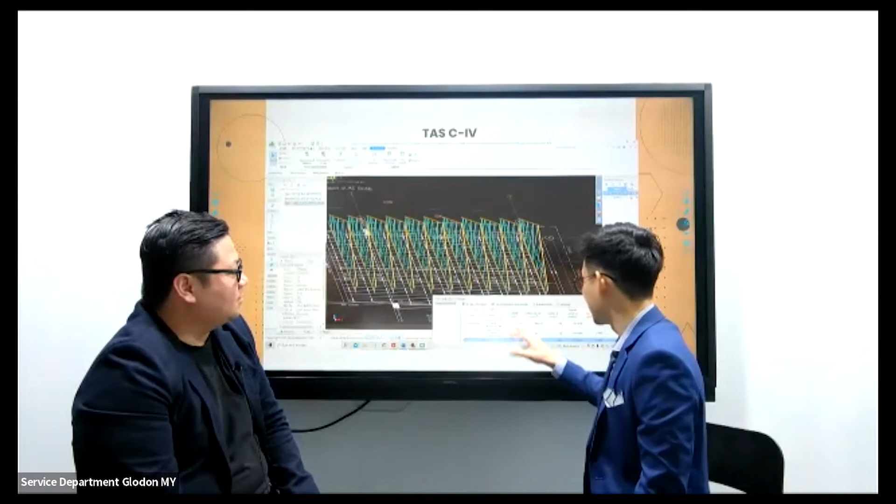So you're able to get the report also? Yes, this is a report. After you calculate, this report will generate. You can see this one. I told you about this, this is a report. The quantity, you have kg, you have surface area, you have piece, and then you have meter, and then area for the section as well. And it's good, yes.

So yes, for model-based cost information, what is actually the value for us to go through digitization, right? It actually includes the estimator QS first. Earlier in the planning stage, it allowed us to be more effective in the construction cost estimation. That will actually lead to the growth of the model-based cost estimating, right?

By using the BIM tools, our QS cost, 5D BIM tools, it will reduce the time consumption and allow the QS to focus more on higher value factors, like identifying the construction assemblies and also the factoring risk. So again, as a QS, we know that quantifying is just one of a very tiny task, but it actually brings a lot of impact to our total construction cost, right?

Because back to the square, quantity times rate, it will be the amount. This will be the very basic one, and the very basic one is actually bringing us back to square. So this will be the first important thing.

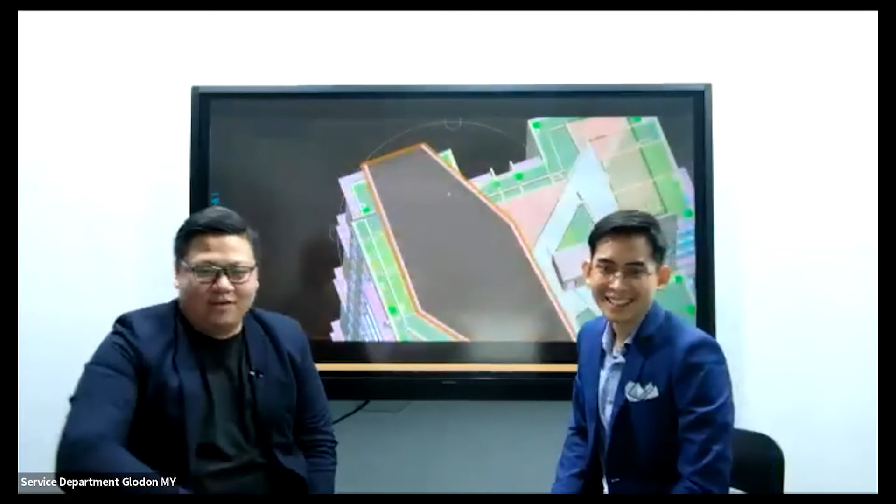Okay, the first question: bolt and nuts, can it be calculated? What's your point of view?

For me, before that I used to use point features, or maybe in the new features we have the quantity custom point, as well as custom the thick one as well, the legendary quantity. From this you can point around using the count, the 2D measurement tools, the count exactly. Because I know Vivian Yap is asking about this, they want more specific on this area, they want to know how many bolts actually are on that. By using this model alone, they can actually collect all the data just in a single model.

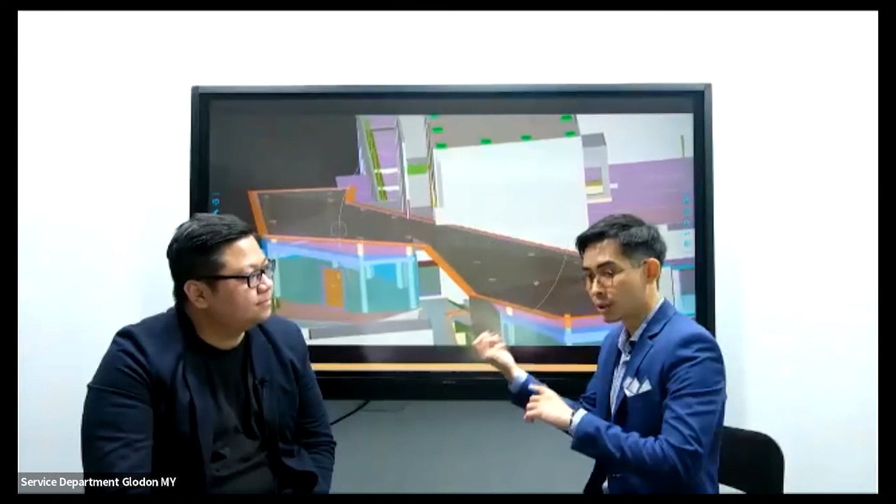And also in future use for scheme as well, this is how it can be done. If you want to know more about this, we've got some sales staff over here, so you can ask them to do a demonstration. This can be done, point and also the quantity.

For information, our TAS software is not only able to build the 3D, we also have the 2D measurement tools, the custom quantity. They are able to count it by number, rank it in meter run, and also get the area in meter square. So we are also able to have the very last element that you see in the TAS functions there.

So the second question: the elevation functions at the diagonal area, is it only for steel structure, or can it apply for the RC column and the jet roof? I think I might let me answer it.

For this one, yes, elevation. First of all, you need to make known the elevation. We have the floor elevation, also the end elevations, right? So the thing Chris just showed, the elevation, you need to unlock the end elevations. If you unlock the end elevation, you're able to adjust every single coordination in the software. So you are able to do it, it's doable, Chun Hok Han, right? Hope you get it.

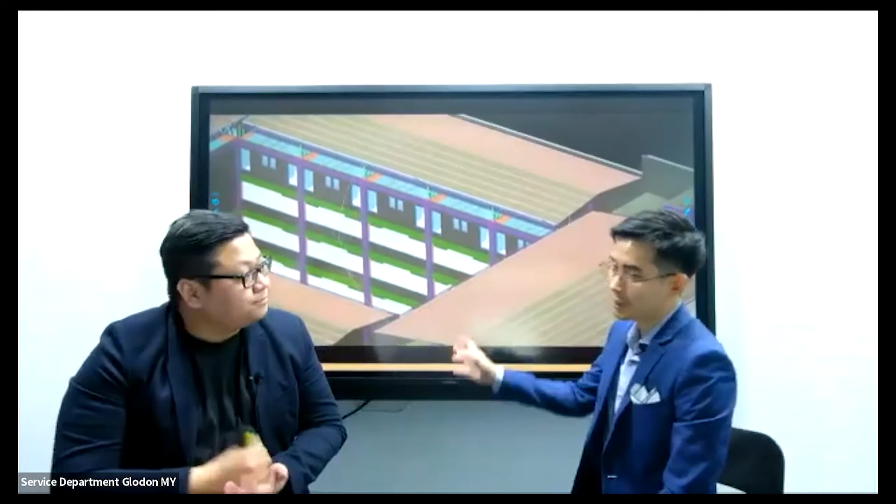Yeah, I think maybe you can demonstrate how actually it's done. So I already demonstrated, I think it's quite small, maybe too fast. Yeah, so Glodon sales, then they will demonstrate.

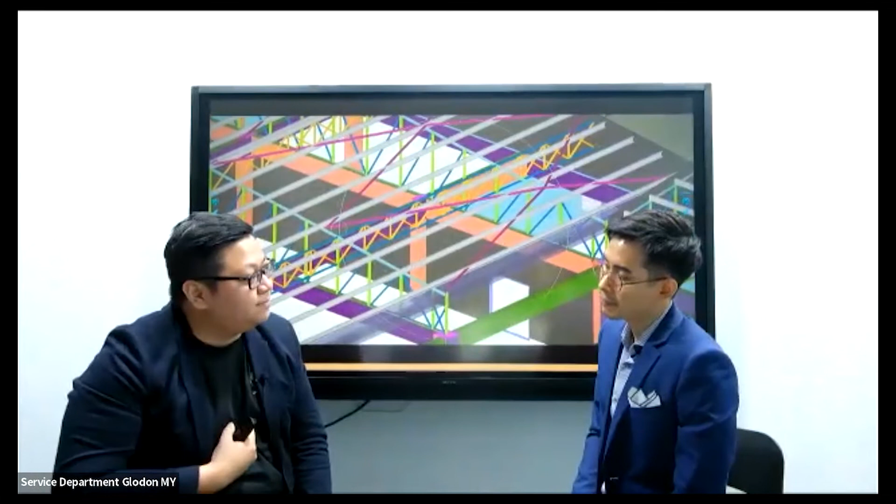However, the quantity can be adjusted manually, like adjusting one of the custom kg values. Once the kg is adjusted, the actual quantity report reflects what you want. But in 3D, you can't do it too much. With Glodon's future features, we'll have better support for this. At the moment, the quantity is correct because it's calculated by the software. This brings up one of the functions that Glodon or our product may have missed. We're going to improve this part for various sizes of steel members.

Okay, thank you, thank you, Damon. Right, the next one: if I have a specific steel structure weight design.

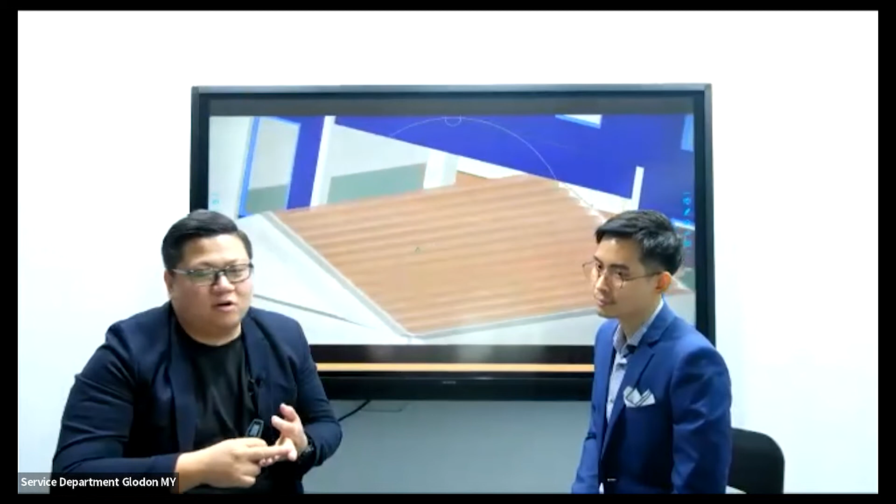Am I able to create a custom value in the TAS software? Yes, in our software it presets the standard code, a very organized standard code. You have UC, SHS, CHS (circular hollow section), all types of steel with the standard code and properties like kg per meter. If you have any custom value, yes, you're able to input it. You can manually set a new name and input the value. Usually consultants ask, can I adjust this by around 50%? In BQ you can add 50% or 10% for the connection part, so usually they ask about this, and it can be adjusted within the software for all the steel.

I think you can see something in the attribute editor. You can ask Glodon software support, they'll explain in more detail. You can adjust it inside the software itself, or put it in BQ to get the net figure, then carry it to BQ and directly times it by 15%.

Okay, so very last question, from Billion: Can you measure steel plate separately by different thickness to summarize the quantity by category for steel plate? To put it very simply, if you want to organize things by number, you do it by number.